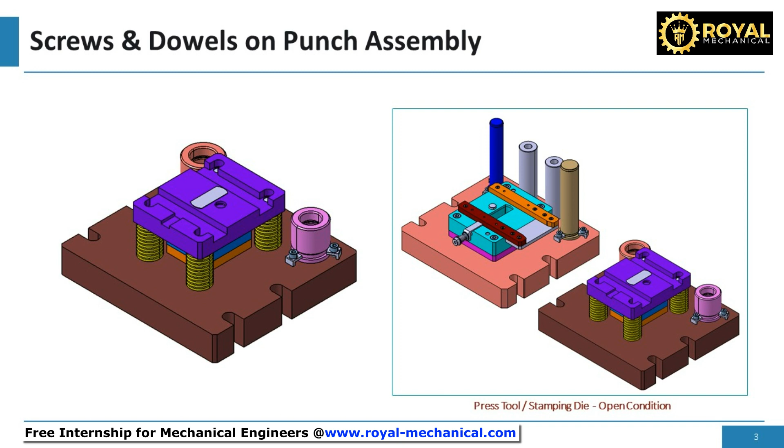Welcome. In this e-learning module, I shall demonstrate and make you understand how to assemble screws and dowels to the punch assembly using Catia V5.

First, let's assemble the hexagon socket-headed cap screws to fasten the punch holder, punch back plate, and the top plate.

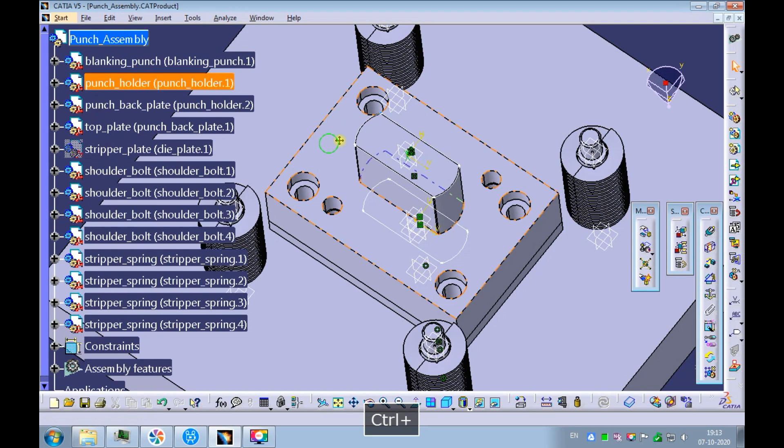Hide the stripper plate. Measure the distance between the counterbore surface on the punch holder and the top plate's bottom surface. The measured distance is 35 mm. Remember, we are using an M10 screw to fasten punch holder, punch back plate, and the top plate. Hence, we need a threaded engagement of a minimum of 1.5 times the thread size. Hence, we need to add 15 mm to 35 mm. We will need a screw length of 35 mm plus 15 mm, which is equal to 50 mm.

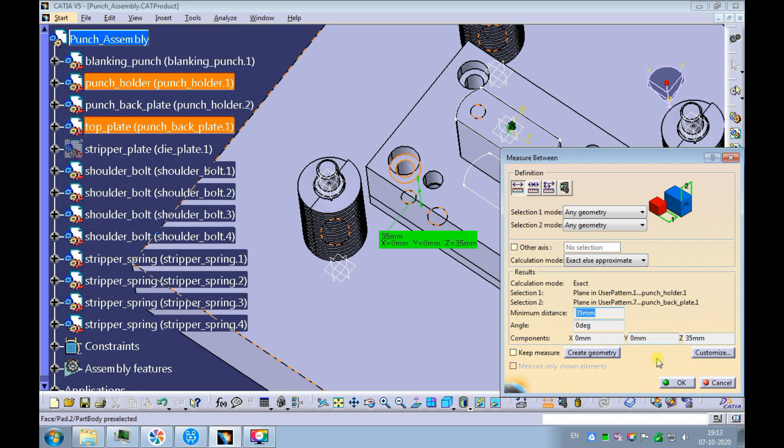Click on the catalog browser. Observe there are standard parts in the catalog browser. Double-click on screws. Double-click on hexagon socket-headed cap screw.

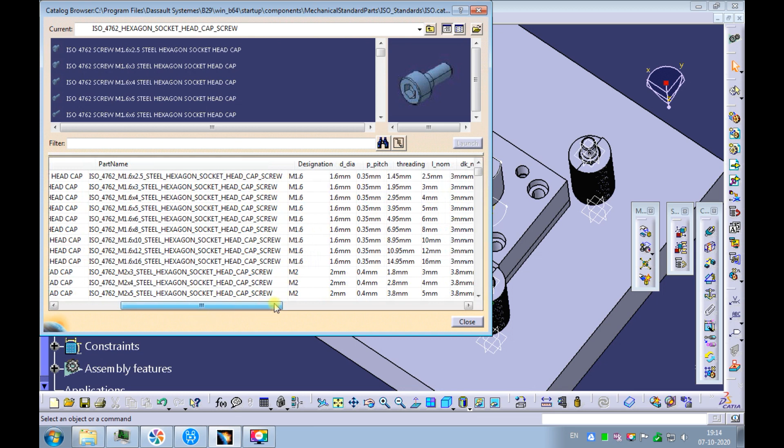Search and double-click on M10 screw with 50 mm length. Click on OK. Close the catalog browser. Observe hexagon socket-headed cap screw is inserted into the assembly.

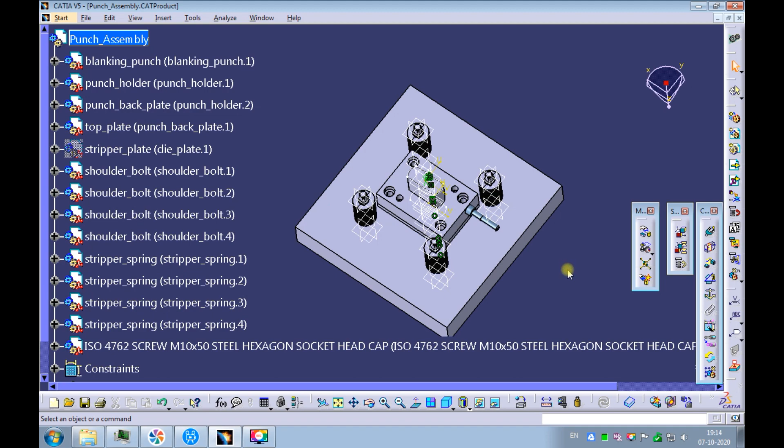Use the manipulation command and drag the screw. Provide a coincidence constraint between the axis of the screw and the axis of the counterbore hole. Provide a contact constraint between the screw head's bottom surface and the step of the counterbore hole.

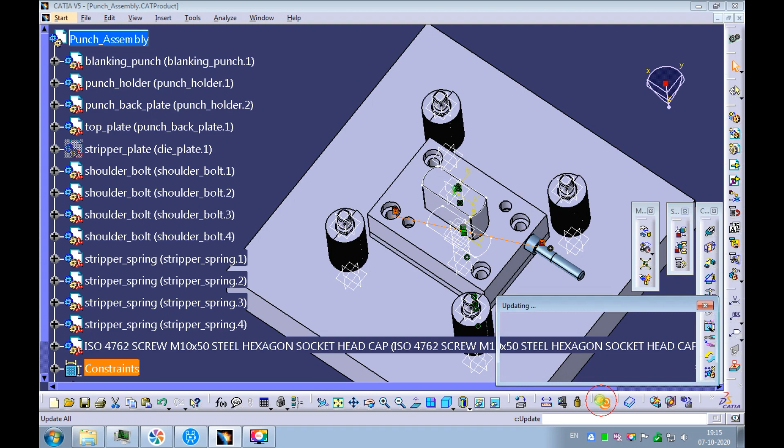Update the assembly. Observe the hexagon socket-headed cap screw is assembled in its position. Also, observe the top surface of the screw and the top surface of the punch holder is at the same level. It is always better we apply the screw below the punch holder surface.

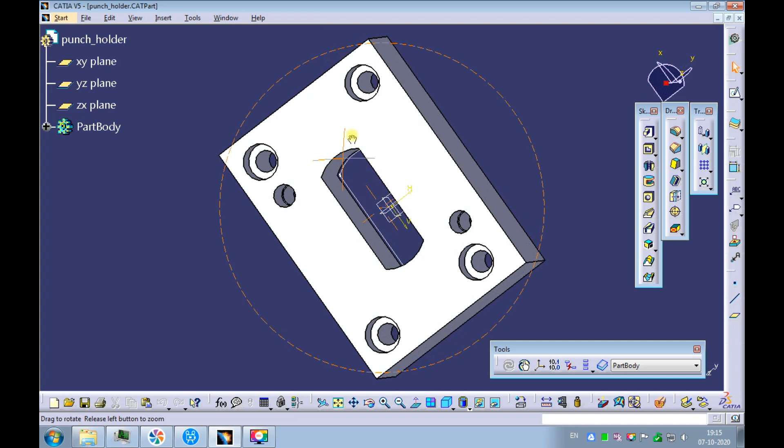Right-click on the punch holder and open it in the new window. Double-click on the counterbore hole to redefine the parameters. Change the hole standard from metric cap screws to no standard. Increase the depth of the counterbore by 1 mm.

Set the view to isometric and fit all in. Save the punch holder. Close the punch holder.

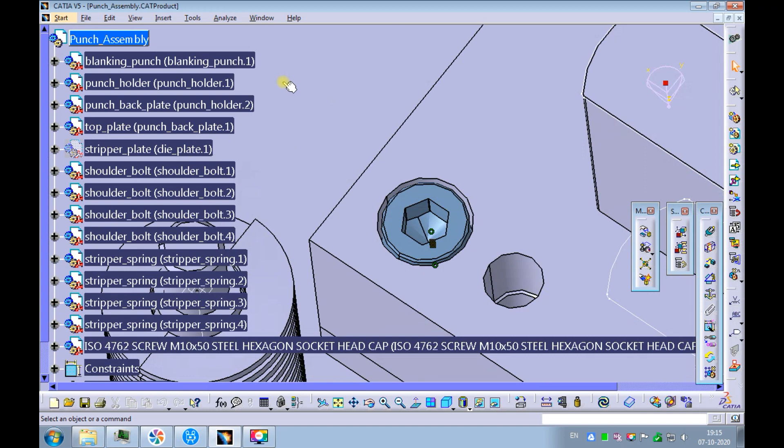Update the assembly. Now let's assemble the remaining screws to the punch assembly. Pick the hexagon socket-headed cap screw on the product structure. Pick the reuse pattern command.

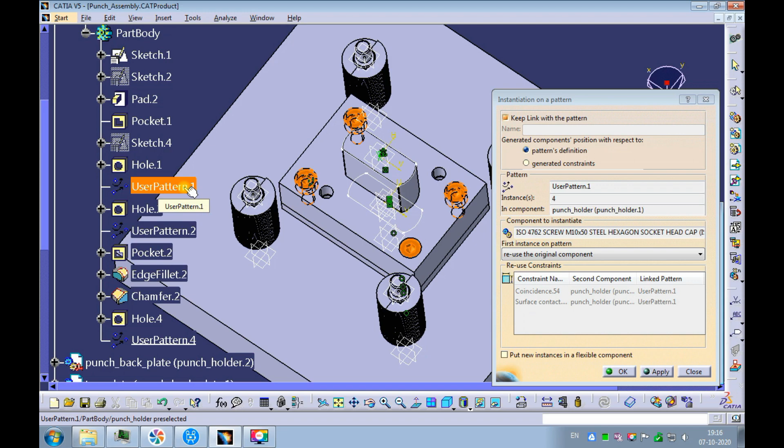Pick the counterbore's user pattern. Observe, all the screws are assembled in the counterbores. Pick OK. Next, let's assemble the dowel pins to locate the punch holder, punch back plate, and the top plate.

Pick the sectioning command. Pick volume cut on the result tab. Observe the dowel holes.

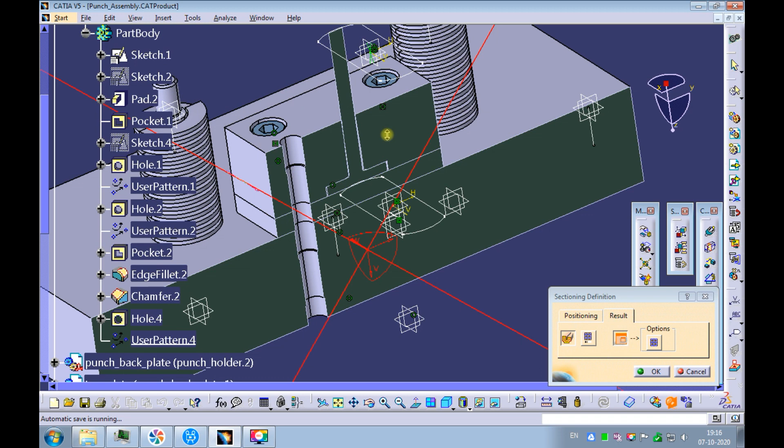Observe we have clearance holes on both sides of the top plate. This is not correct. We need to delete the relief hole, which is towards the punch back plate.

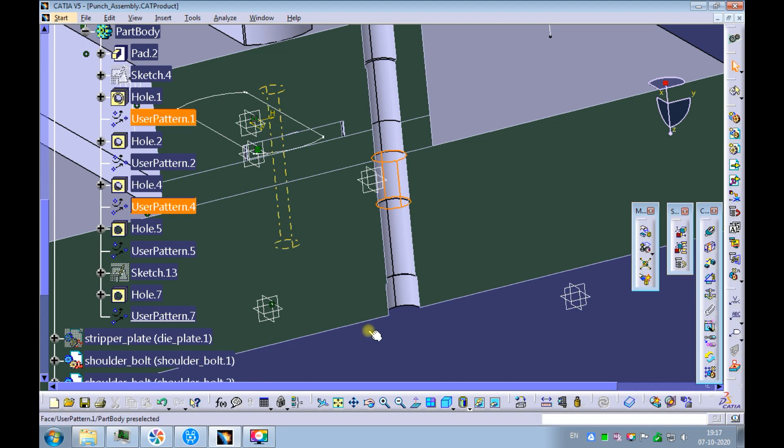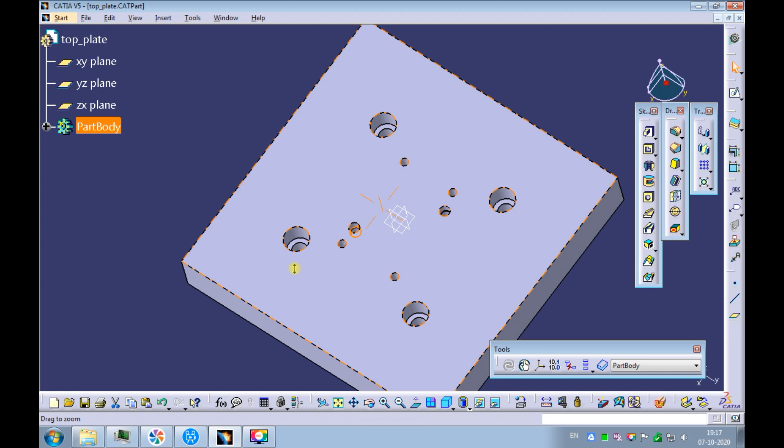Right-click on the top plate and open it in the new window. Delete the unnecessary relief hole and its user pattern.

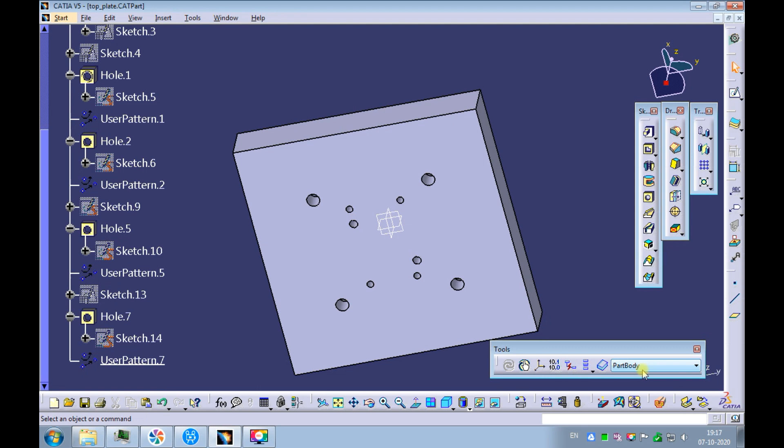Set the view to isometric and fit all in. Swap the window to the punch assembly. Observe the length of the dowel hole is very long.

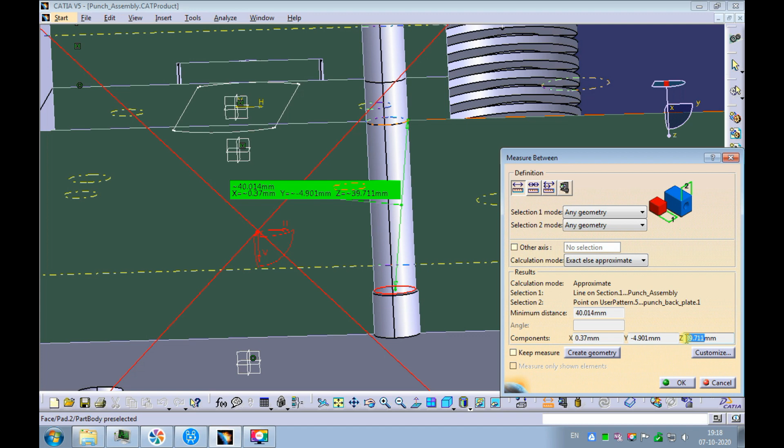Measure the distance between the top plate's bottom surface and the dowel relief hole's top edge. The measured distance is slightly more than 39 mm. As we are using a dia 10 mm dowel, we will need the dowel engagement of 1.5 times the dowel's dia. Hence the dowel hole depth of 15 mm is sufficient.

Let's increase the depth of the dowel relief hole. Swap the window to the top plate.

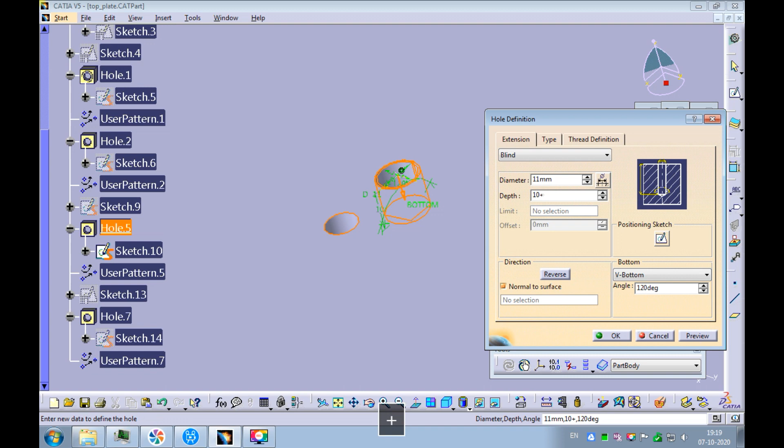Double-click on the dowel relief hole to redefine the parameters. Increase the depth of the hole by 25 mm. Set the view to isometric and fit all in.

Swap the window to the punch assembly. Measure the distance between the bottom surface of the top plate and the edge of the dowel hole.

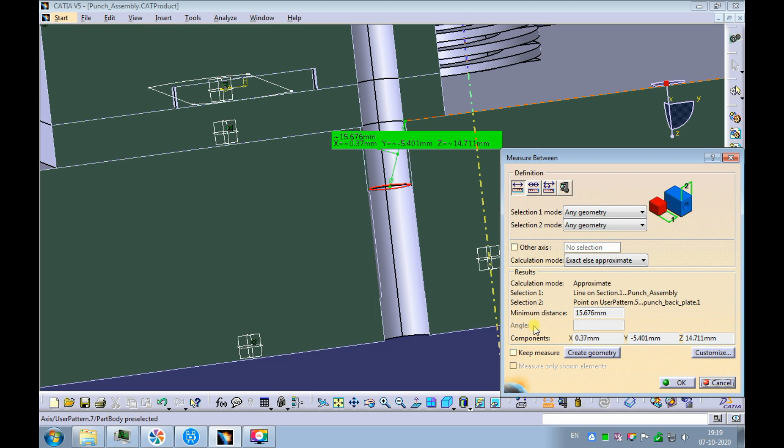This is the length of the dowel engagement. The measured distance is slightly more than 14 mm. It would have been better if this was more than 15 mm. We will update it later.

Measure the distance between the dowel hole's top edge and the bottom edge of the dowel hole. This is the length of the dowel pin we need. The measured distance is slightly more than 44 mm.

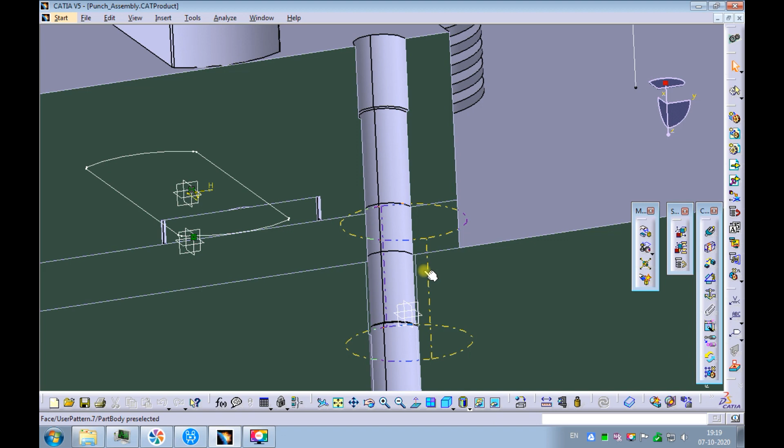Measure the distance between the bottom edge of the punch holder and the bottom edge of the dowel hole. This dimension is essential for the assembly of the dowel pin. The measured distance is slightly more than 15 mm.

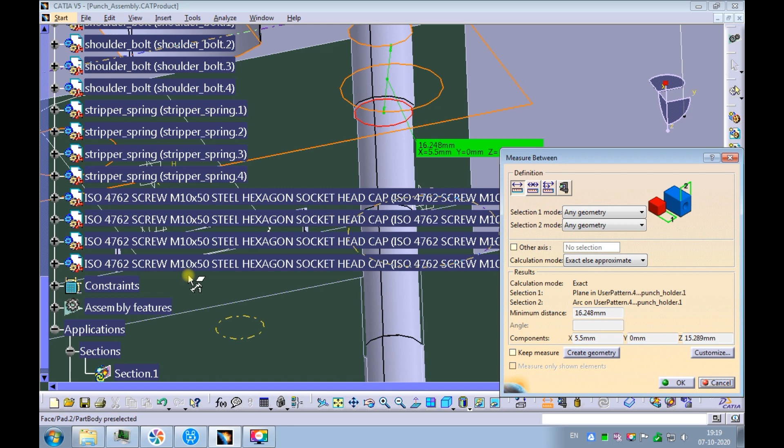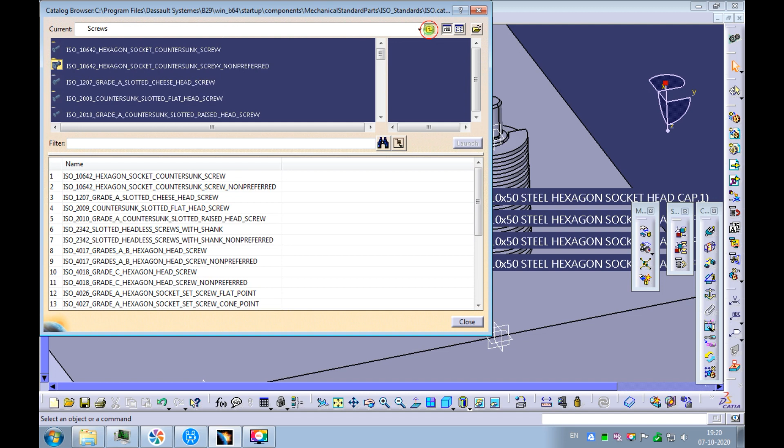Delete the section. Click on the catalog browser. Double-click on pins. Double-click on parallel pins.

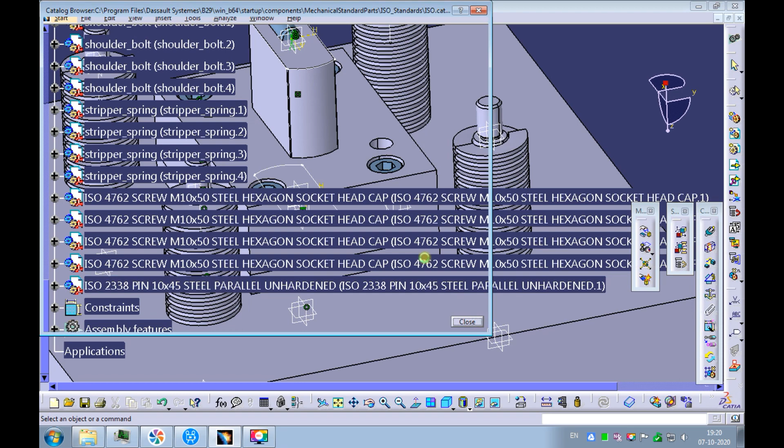Search and double-click on dia 10 mm dowel with 45 mm length. Click on OK. Close the catalog browser. The dowel pin is inserted into the assembly.

Use the manipulation command and drag the dowel. Provide a coincidence constraint between the axis of the dowel and the axis of the dowel hole.

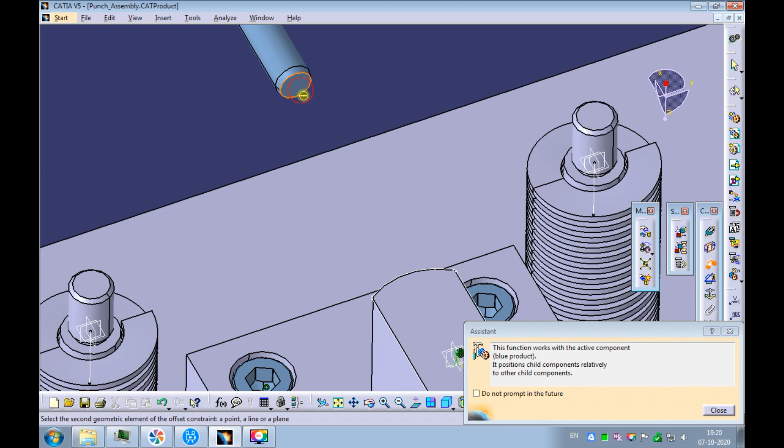Provide a distance constraint between the bottom surface of the dowel pin and the punch holder's bottom surface. Enter the offset value as 15 mm. Update the assembly. Observe the dowel pin is assembled in its position.

Pick the sectioning command. Pick volume cut on the result tab. Observe the dowel pin is perfectly positioned in the dowel hole.

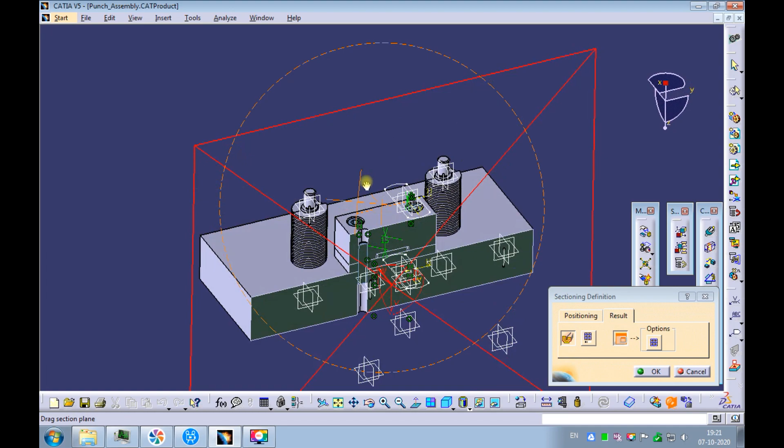Now let's assemble the remaining dowel pin to the punch assembly. Pick the dowel pin on the product structure. Pick the reuse pattern command.

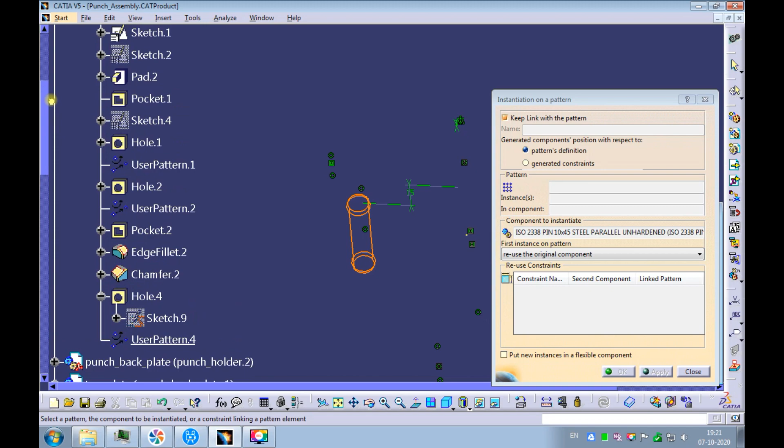Pick the user pattern of the dowel hole. Observe, the remaining dowel pin is assembled in the dowel hole. Pick OK. Set the view to isometric and fit all in.

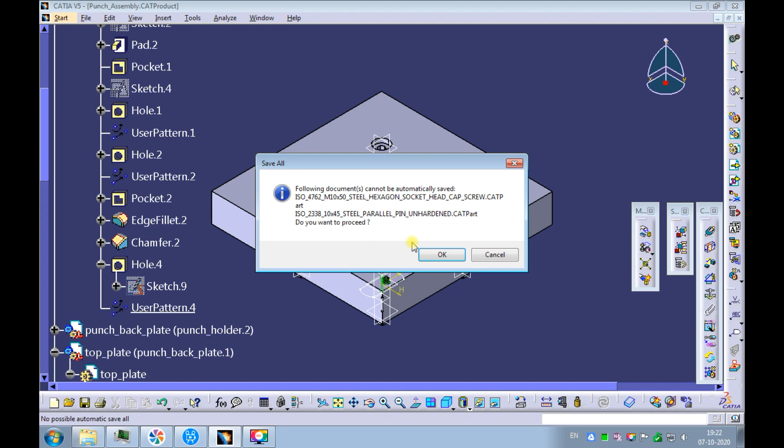Click on File, Save All, to save all modified documents in session. A warning message appears indicating a few files cannot be automatically saved. Click on OK. Observe the catalog parts that need to be saved.

Pick the catalog parts and click on Save As. Make sure the file is getting saved in the project folder. Click Save. Repeat the same for all parts.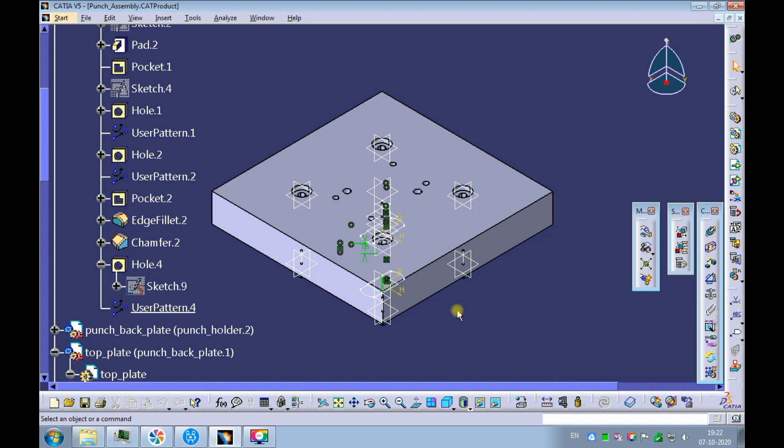Click on OK to save all modified and new catalog parts in the session. With this, we have successfully learned how to assemble screws and dowels to the punch assembly using Catia V5. That's all in this e-learning module. Thanks.